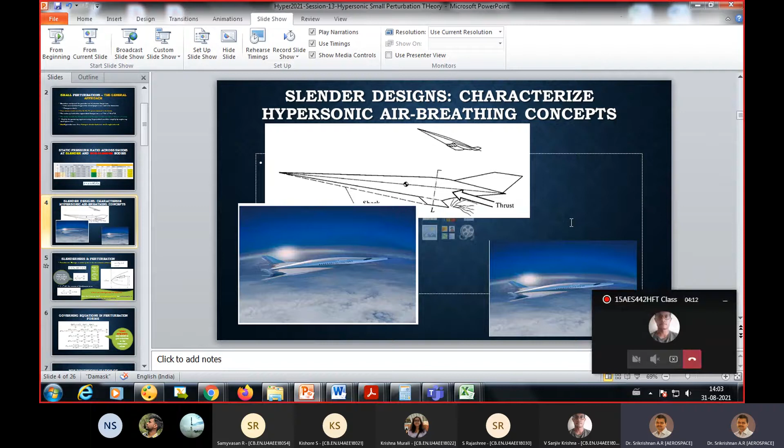Yeah, so we were discussing the basis of small disturbance approach in hypersonic flow. We'll advance it further today. We'll take a few sessions to complete it. But today we'll continue from where we have stopped as the introduction to the topic. Now,

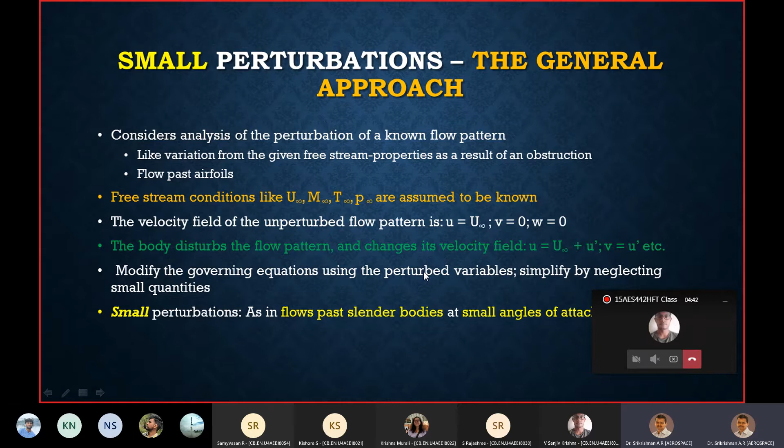as we have seen already, and as you are familiar from the fundamentals that you had for small perturbation approach in aerodynamics in general, the whole concept is based on the response of the flow to a small disturbance. So wherever we can approximate the flow deflection and the concomitant velocity variations from the mainstream components to be small relative to the mainstream components, then we have a chance to apply the small disturbance approach or small perturbation theory.

That's how it is done in aerodynamics in general, and that's the same thing we are going to extend to the hypersonic region. Now, in hypersonic flow, this is particularly useful because the hypersonic designs, as far as air-breathing concepts are concerned, as of now, that is, wherever we are at present in the global body of knowledge, of course we know that it's a futuristic idea.

I have a video which I'll try to share at the end of this class, where Boeing explains where they stand now and what are some of the future plans that they have for hypersonic flight. And it's going to be a somewhat distant reality. But all the current designs that people have in mind are relatively thin. That is, they are going to be more like slender bodies than blunt ones.

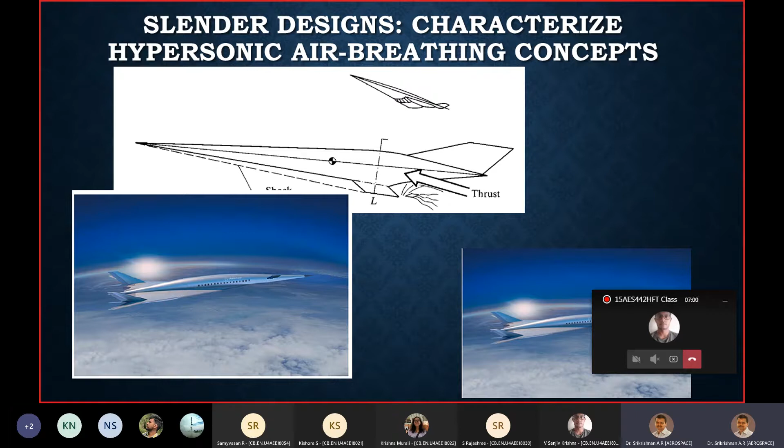Okay. So this slender body aerodynamics is going to be of particular interest in applied hypersonic aircraft propulsion. And that's one reason why some of these approaches that we are discussing are going to be still useful despite the main constraints that they have in terms of the assumptions involved.

Okay, so with that preface, I don't know whether I described this particular slide in the previous class. Sorry, did I explain this? That is how we are going to non-dimensionalize the velocity as well as the length. Somebody please. Did I present this slide in the last class? I think I just stopped at this. Nobody's sure. Anyhow, so I'll just start from here.

A perturbation means, as you know, a change in velocity. In fact, a change in any flow parameter for that matter. We are going to focus on velocity. So in our discussion, perturbation means a change in velocity with respect to the mainstream velocity. So you have a mainstream flow approaching the body at a velocity V infinity. We are considering a body here where we are assuming it is slender enough to have an attached shock.

And now, what is our interest? Our interest is in predicting or having tools that can help us estimate the static pressure distribution along the wall of the entire body. So for this consideration, we are just looking at zero angle of attack. Okay, so you have a mainstream flow V infinity over the body, and we know that there are going to be variations. This we have discussed about U and V components.

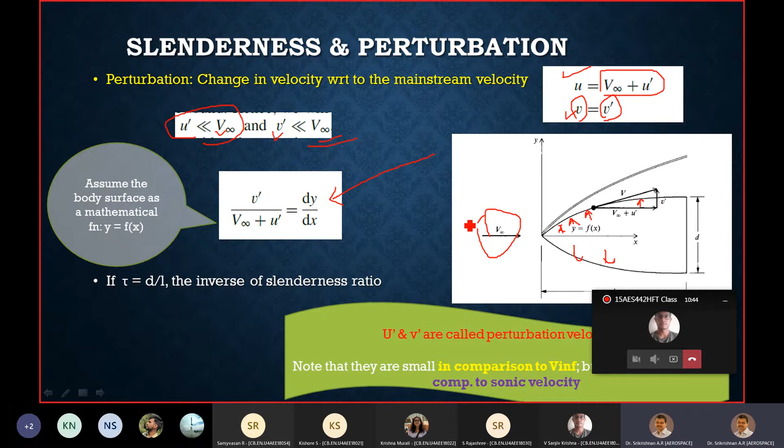Okay, now we need to also incorporate the geometry of the body. For that, let's look at this expression here. The body surface is going to be considered as y being a function of x. Y, that is the y coordinate, as a function of x. Now, if so, the dy by dx for the body surface, y equals f(x) is the body surface.

Dy by dx can be stated as a ratio of the changes in y component of velocity to the x component of velocity. Now, what is the change in y component of velocity? Y component of velocity to begin with was 0, and it becomes v dash. So v dash by v infinity plus u dash.

That is, the new velocity is v infinity plus u dash. It was originally v infinity, but because of the body, there is an increment which is u dash. So then the net velocity in the mainstream direction, the x direction, is v infinity plus u dash. So v dash divided by v infinity plus u dash can be equated to the slope.

Now, where is this coming? You can understand that more readily from the picture. The v dash is marked here. I hope you are able to interpret the meaning of v dash there. It's a y component of the velocity. Okay, and what is the x component of velocity? It's v infinity plus u dash.

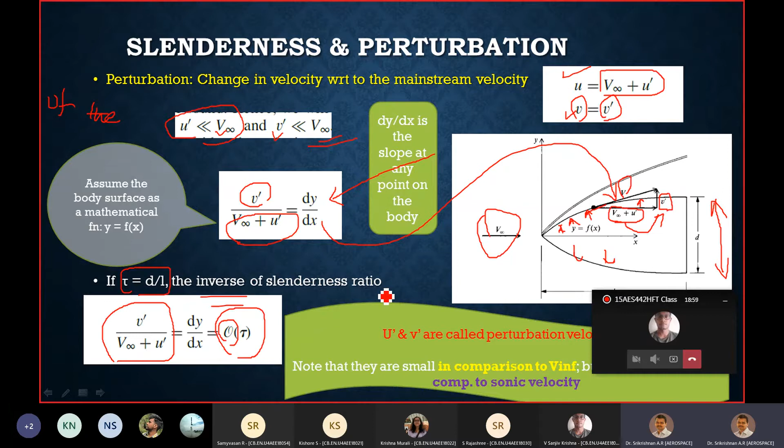You can go to the next slide, sir. We'll continue. Yeah, there are a lot of such expressions and equations, etc. If at any point anything has to be revised, I'll be happy to do that. But for now, I'll just keep going.

So we have a set of equations here, but if you look at them, they are familiar. We have already referred to them. The only thing that I have done now is to rewrite them in terms of the perturbations. For example, the first one, the continuity equation: dou rho u by dou x plus dou rho v dash by dou y plus dou rho w dash by dou z. The first term is modified as rho times v infinity plus u dash. Now why v infinity plus u dash? We are rewriting the equations using the perturbed variables.

Okay, are we justified in doing this? Yes, because they are the governing equations which should be applicable everywhere in the flow field as long as the flow is steady and inviscid. Keep in mind, the form of equations that we are dealing with are steady inviscid forms of governing equations. So we are now applying these equations to the perturbed flow field, and I can express velocity in terms of the perturbed velocity.

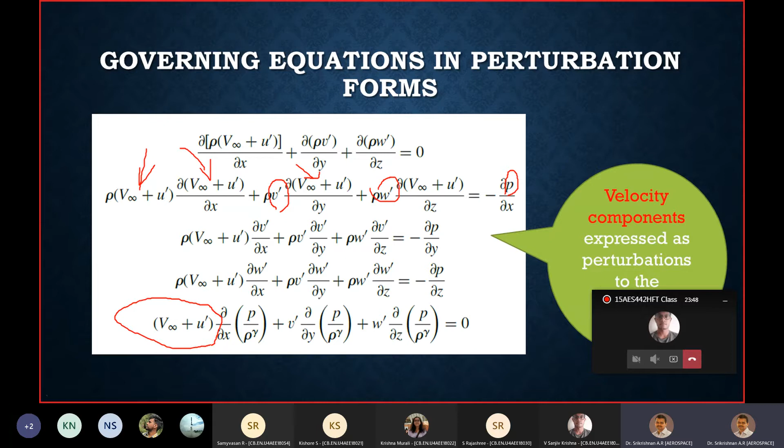Okay. Now the next step is to non-dimensionalize them. What's the importance of non-dimensionalization? We have discussed it already. With non-dimensionalization, we will be able to make the analysis independent of the geometric dimensions. And also here in perturbation theory, non-dimensionalization has even more utility, as we are going to see soon.

But let's first understand that when we are looking at the non-dimensional parameters, we will be first focusing on the slenderness, or the inverse of slenderness, tau, d by L, which is less than 1. d by L, that is the diameter, the transverse dimension, divided by the length dimension. It has to be less than 1 because we are assuming slender bodies. Slender bodies, that is L by d is high, which means that d by L has to be low. Bodies which are long and thin, as opposed to thick and short.

This is a blunt body. This is a thin, slender body. So d by L is very small, or in other words, tau is very small. So needless to say, if tau is small, tau squared will be much smaller. So as tau becomes smaller and smaller, less than 1, tau squared tends to 0.

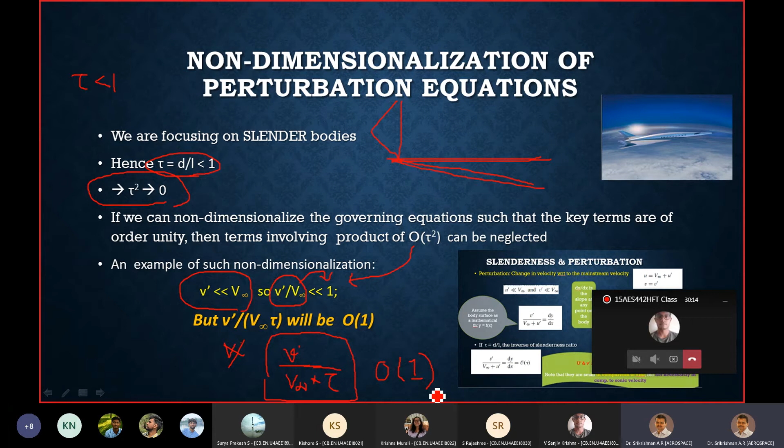Okay, I think I should stop here.

We will continue this, because we need to gradually go into the equations back and forth and then apply or make sense of these simplifications and then try to relate that to the observation. So that's going to be the path that we take in this small perturbation analysis. We'll continue with that. I'll stop here.